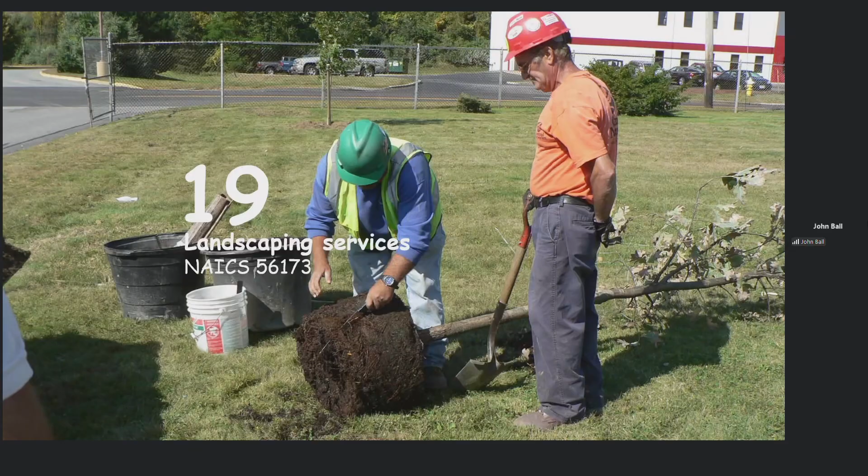Logging's often considered number one, with a fatality rate of about 98 per 100,000, according to the Bureau of Labor Statistics. And as you might expect, this occupation, which we also share some things in common with, chainsaws and trees, is a high-risk profession. But what about us? We're actually lumped under what's called landscaping services, with landscaping, planting trees, pruning small trees, and landscape design installations. So we're lumped in with grounds maintenance workers, mowing lawns, and what they call, and I don't like it, tree trimmers and pruners. We're far more than that, but that's the federal government for you.

But what about just us? If we separate just us, it's 105 per 100,000. Wait a minute, that puts us number one. Now, a couple of surveys actually put us at a close second to logging. That is not where we want to be. But what the federal government has finally figured out is this is a high-risk profession with a fatality rate far higher than most people anticipated. If you go back and look at what I've been writing the last 20 years, I said the numbers are showing we're fairly high, and I don't mean that as a good thing. It depends a little on how you define a tree trimmer and pruner. But any way you look at it, we have a very high fatality rate.

A way to look at it is we're 0.03% of the U.S. workforce. That's far less than 1%. Right? There's not a lot of us in this country, about a quarter of a million. But we're 1% of all the fatalities. That's a lot. Now, do you want to make it worse? Move to California.

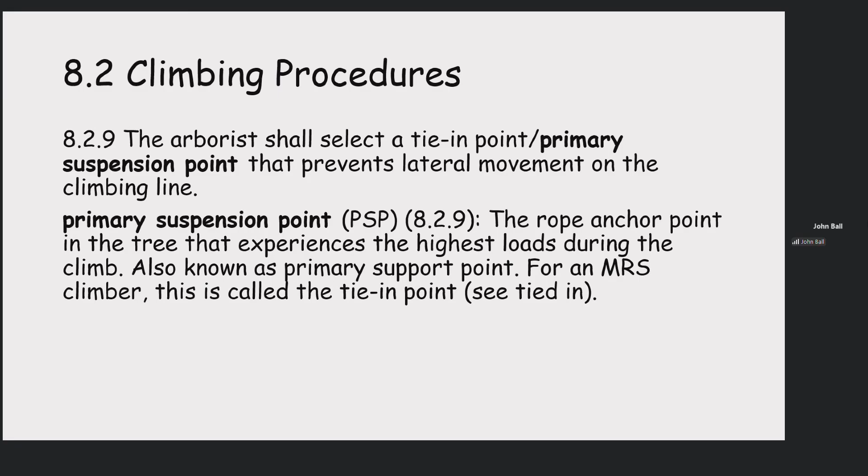Well, what's happening out there? Climbing. That's still one of our most common reasons for a fatality. Climbers who die tend to be a little bit older. Again, getting back to that, we don't bounce, we break. In the old days, we used to free climb. I don't know who remembers that from the 70s, but you'd free climb a tree, sometimes tailing a rope behind you. Well, that's changed, and so have our climbing practices over the last 20 years. Nowadays, we're doing a lot of stationary rope systems. And so with our primary suspension point, we're completely dependent on that holding. Now, that was a change from even '94, where we had to have a climbing line positioned over a branch union or around the trunk.

Nowadays, for canopy anchors, we're often doing this. And there's nothing wrong with this inherently. But if that anchor fails, we're in for a long fall, and we're seeing more of this. Now, we did have in there, we'll test it. Test it by having two people bounce or tug on it. Guess what? That's not a valid way of measuring it, and that has been removed from the current Z.

And here's the reason. You get two people pulling on that, they're pulling with a force on that anchor of about 0.6 their weight, about 240 pounds. One person climbing it is putting a force equal to their weight at all times. And when they're really pulling, a force higher than that, up to 1.4. Brian Kane at UMass has written some excellent articles in Arborist News that have given the numbers behind this. And so the problem is that two people tugging on it is not exerting the same force on the anchor as one person climbing on it. So it gave a false sense of security.

I might mention falls: the higher the fall, the more likely it's going to be fatal. 15 feet, about a 90% survival. You might say, how do you die from a 15-foot fall? Well, your head hits first. At 30 feet, notice that it's about 50-50. Anytime you're climbing above 30 feet, the odds are more that you'll die from that fall than you will survive. If we get fractures and ruptures, when you start falling from a 70-foot fall, you're bouncing through the tree and our survival rate plummets. So every foot you gain in height, keep in mind you've actually increased the risks as well. So manage those risks.

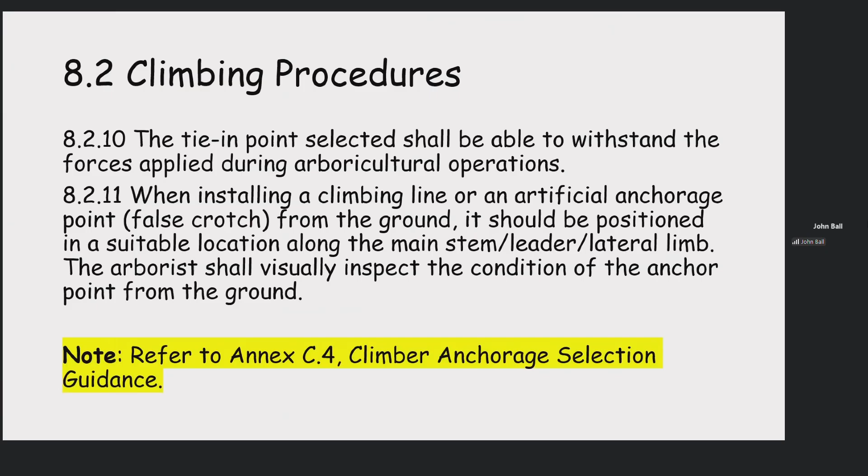Well, how do we do it? We make sure our anchor will hold. Nowadays, what you'll find in the new annex are things you should be looking for to determine whether the anchor will hold, not just relying on the fact that you gave it a bounce test and that should hold it.

Another reason you fall, well, guess what? You only had one form of protection, either your climbing line or a lanyard, and you cut through it with a chainsaw. In the Z, it will make it clear: when climbing, an arborist shall have on their person at all times a climbing line and at least one other means of being secured. And both shall be used when you're operating a chainsaw. So it doesn't matter how you got up that tree, there better be a climbing line with you. And if you're going to be cutting with a chainsaw, that climbing line is being utilized and you're being secured, because what happens is somebody ends up cutting the only line that they had as their fall protection.

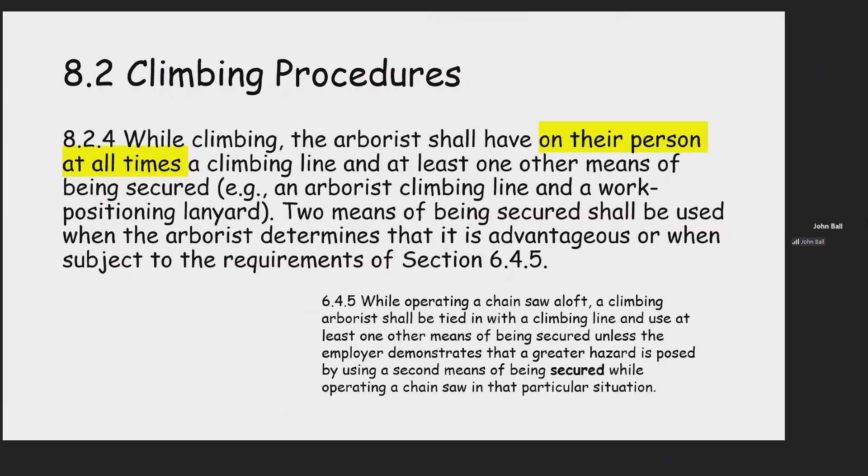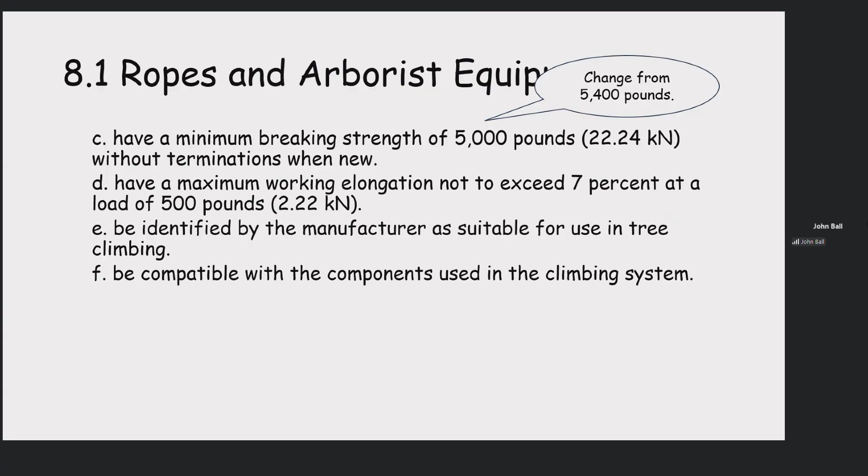As a minor point, we have changed the breaking strength requirements. If you look at our old manila rope, that had a breaking strength of about 2,600 pounds. Our new ones have far higher. Our old systems have been quickly replaced. And so we removed that 5,400 for minimum breaking strength and dropped it to 5,000 pounds. Why? Because all our other hardware is rated at 5,000 pounds. Only the climbing line was higher than that. And so to keep everything in line, it was moved to 5,000.

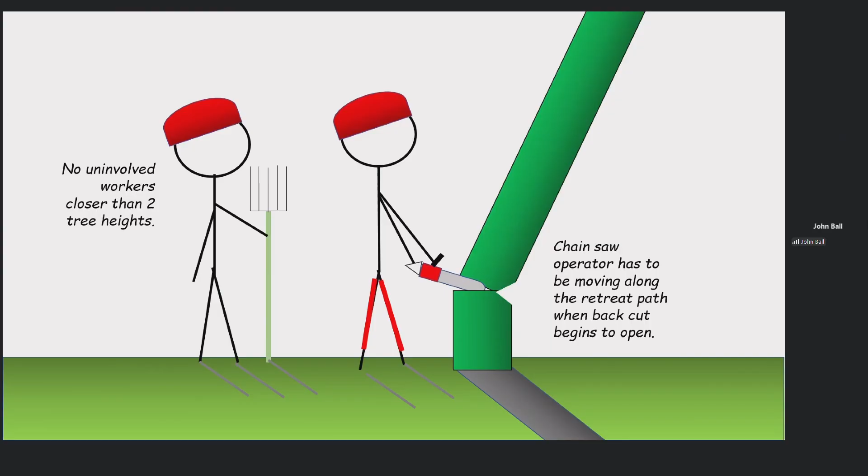Well, struck by a falling tree. This one, it's about the same average age for our industry here. The same average age is still almost the one that's being killed too. So essentially any age can be struck by a falling tree. And there's two reasons for that. Either it's the uninvolved worker standing closer than two times the tree height and struck by the falling tree, or the chainsaw operator was not moving along the retreat path.

Hope you like my artwork.

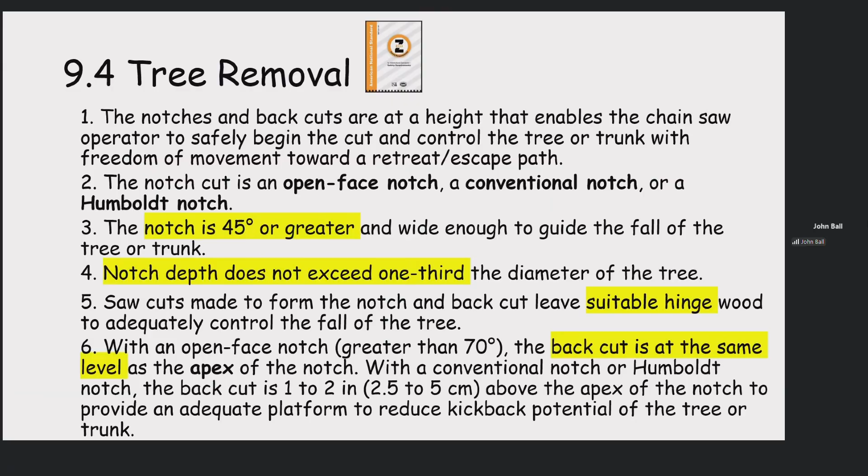How you make your cut, we have not changed that. It's up to you: conventional, open face, or Humboldt. We just have that the notch shouldn't be more than a third, and you have to leave a suitable hinge. If you're doing conventional, notice that the back cut typically is made slightly higher. The reason being is, in order for that tree to hit the ground, it's got to snap off the hinge, because you're closing the cut and the tree's still falling.

With the open face, it's made at the apex. Why? You can have that tree reach the ground and the hinge literally bends that far, because the tree will reach the ground before it's completely closed that notch. This is one reason we tend to use this quite a bit, not exclusively, but quite a bit, because we want to make the hinge work longer.

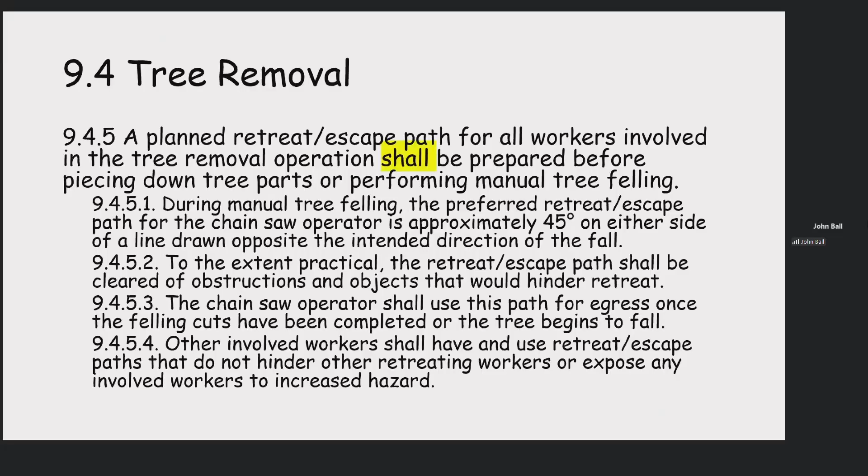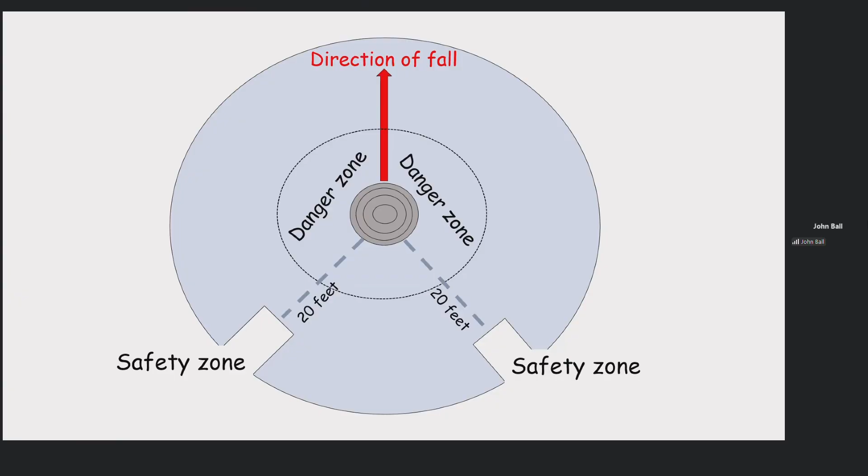Well, everybody stops to watch every time you're felling a tree, and no difference here. The crews are all watching, and this went well. He's got everything ready. They do have a rope on it, but now we do have an error. And the error is he is standing next to the tree rather than walking along his retreat path. You're always supposed to be moving along your retreat path, 45-degree angle back, the second the top of the tree begins to move or the back cut begins to open. Most of the chainsaw operators that are killed are within about 10 feet of the base of the tree. Why? They were standing there, not moving, and they were struck by the tree as it rolled or kicked back.

Well, the other half of fatalities are to the ground crew. And what we're required to do is give a command when we're ready to start the back cut and not to do the back cut until we have a response. We have removed what language to use from the Z. What you use as a command or response is up to your company and should be in your safety policy. But we didn't specify what two terms you use. But you shall use a warning before making a back cut and wait for a response before proceeding.

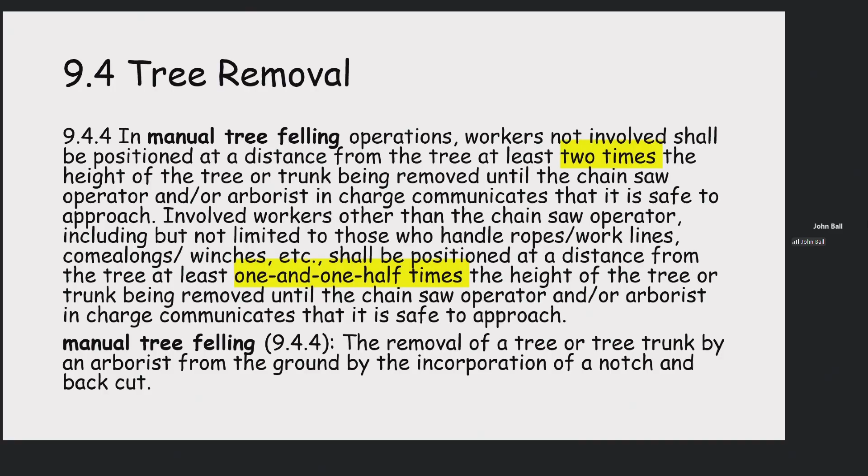Now, where does everyone else have to stand? If they're uninvolved workers, they're not tending a pull line, then they need to be 2 times the height of the tree, 2 times the height. If they are tending the line, in other words, they're an involved worker, then they can be no closer than 1.5 times the tree height. So if we look at that, the chainsaw operator is standing at the base of the tree, they have to in order to do the job. Involved workers no closer than 1.5 times, and then everyone else 2 times the height of the tree.

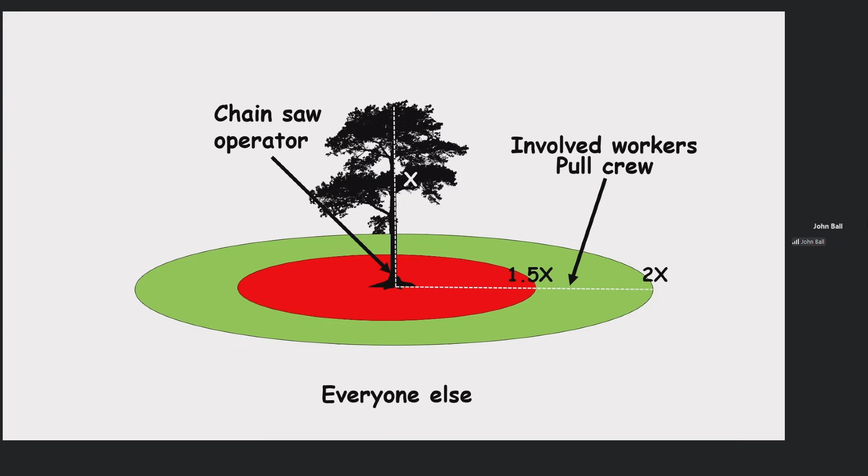If we followed that other half that's killed, people being struck by the falling tree, either the involved worker standing too close or someone just wandering by. In other words, they don't have anything to do for the job yet. Those are the ones that are killed, and we're trying to keep them outside that zone.

Well, electrical is still our big one here. It's a top three killer of tree workers. Everyone should have a fundamental knowledge of this. And I also want you to note that this is one area where we actually have a higher fatality rate among younger arborists than older arborists. The thought being that if you've been doing tree work for 30 years or so, you probably developed that sixth sense to be aware of the conductor, that you've looked for them.

Otherwise, electricity kills young as well as old people. So it's not that as you get older, you have tougher skin and you're not going to be impacted by it. It's just you've been working a long time, you have a higher situational awareness. And we have to know the entire system, from phase wires to neutrals to secondaries to comm wires. The entire electrical system for distribution is something we're all supposed to be aware of.

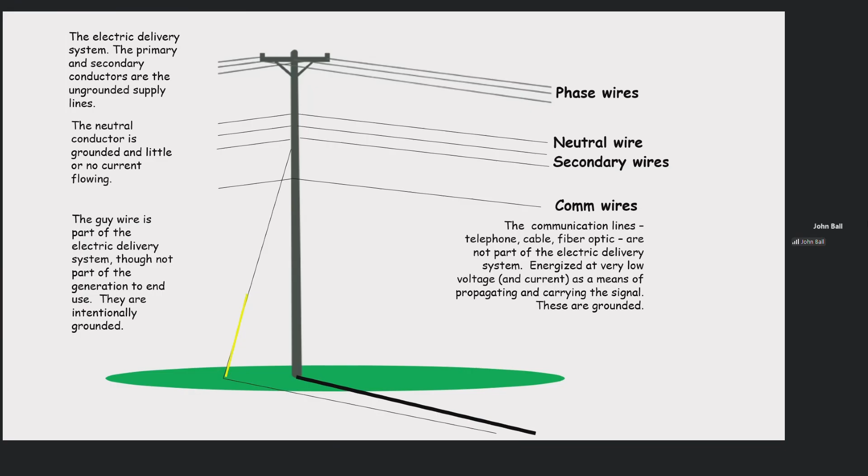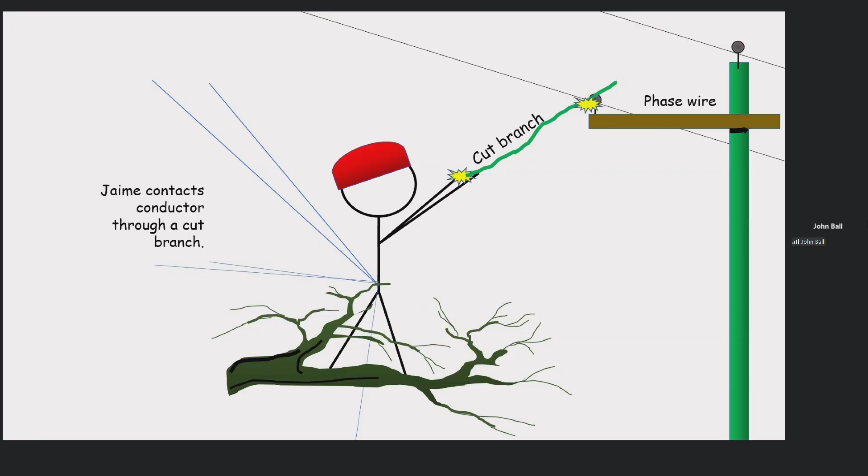Well, how are we killed? Number one, about 26%, the branch you're cutting. You either just cut it or you're cutting it. It comes in contact with the conductor. Example here, Jaime's holding a branch and the branch makes contact with the wire while Jaime's holding it, and Jaime dies. Now, interestingly enough, the diameter of the branch is a factor in conductivity as well as its length.

Palms, for example, we have a lot of palm fatalities, a lot of palm electrocutions. And even in the Z, we say, you know what, you've got to follow the standard on these, because you touch a palm frond to a power line, it's amazing how often that kills people. And Florida leads the country in electrocutions, and it's because of palms.

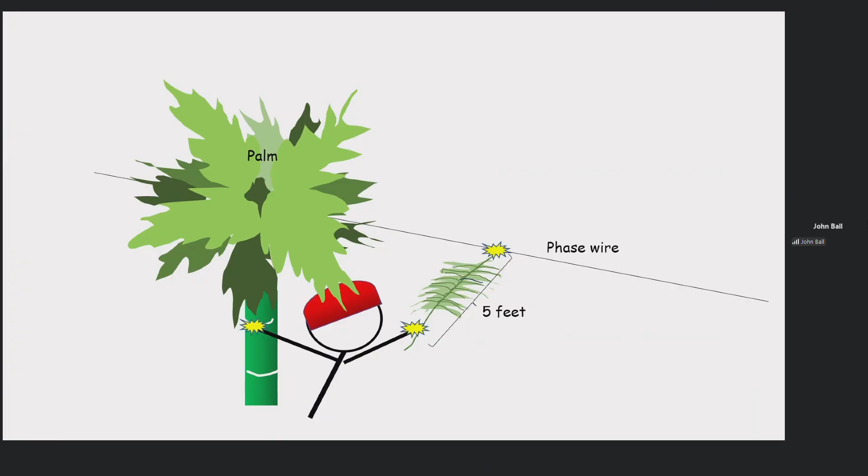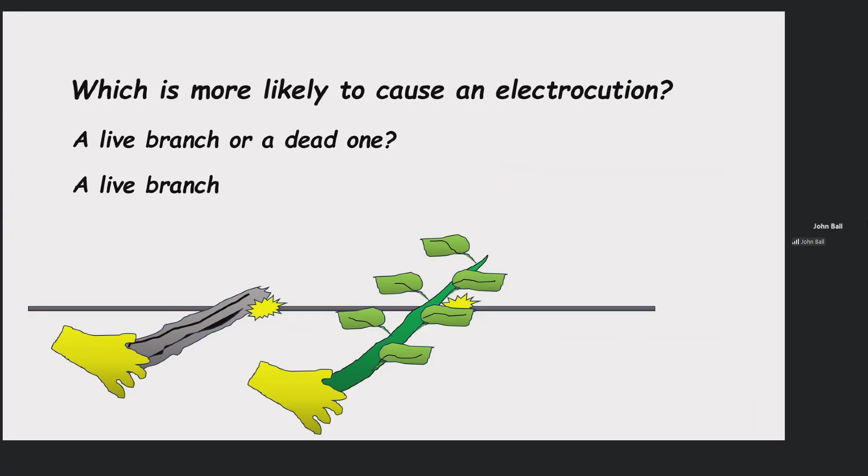So let me give you a quiz. What's more likely to cause an electrocution, a live branch or a dead one? Hopefully, you know it's a live branch, more conductive. All right. Second question. What's more likely to cause an electrocution? Holding a long branch at its base or a short branch when it touches the wire? Well, I think that's pretty easy. Holding the short branch is more likely to have an electrocution.

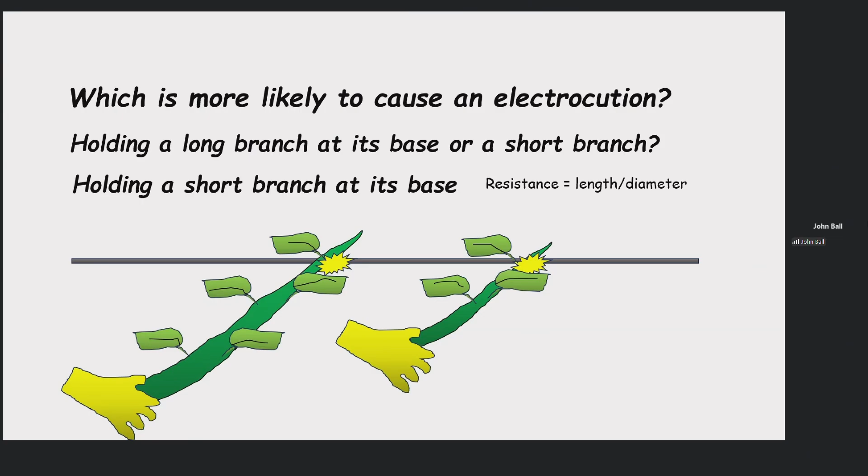Why? Because resistance equals length divided by diameter. So the more length of the branch, the more resistance you're going to have to that branch. But here's one that confuses people. Holding a large diameter branch or a small diameter branch. All other things being equal, the large diameter branch is going to cause more of an electrocution. You might go, whoa, wait a minute, I wasn't thinking of that, but keep in mind that formula. Resistance equals length divided by diameter.

Larger diameter is a larger hose. Think of it as a larger gauge wire. So they're more conductive, and that ends up killing arborists. They sweep a small diameter branch against the wire and they get a tickle. And they think, well, that doesn't harm me. No, they just got lucky. They grab a larger diameter branch and do the same thing, and they're flat out killed.

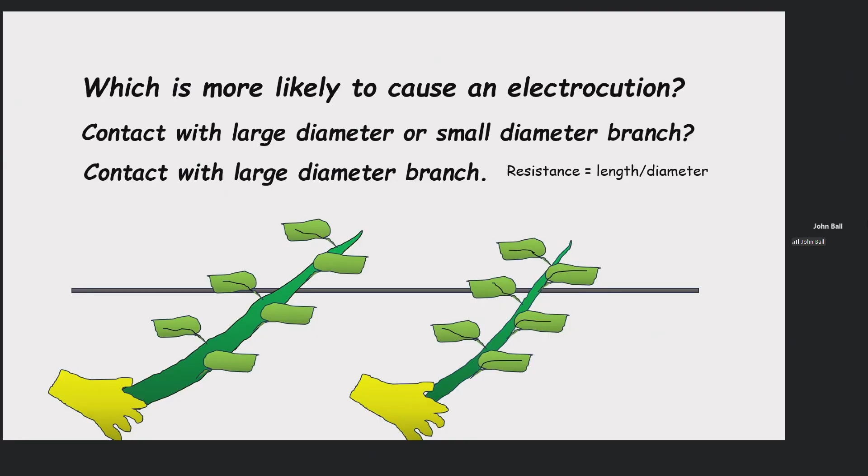Number two, it's the conductive object you're holding, such as a pole pruner. And you shouldn't be carrying metal pole pruners in trees. Quite often, these happen because no one did a good job inspection, and they were unaware that a power line was even up there. But these are the second most common killer. And notice now we've covered about 50%.

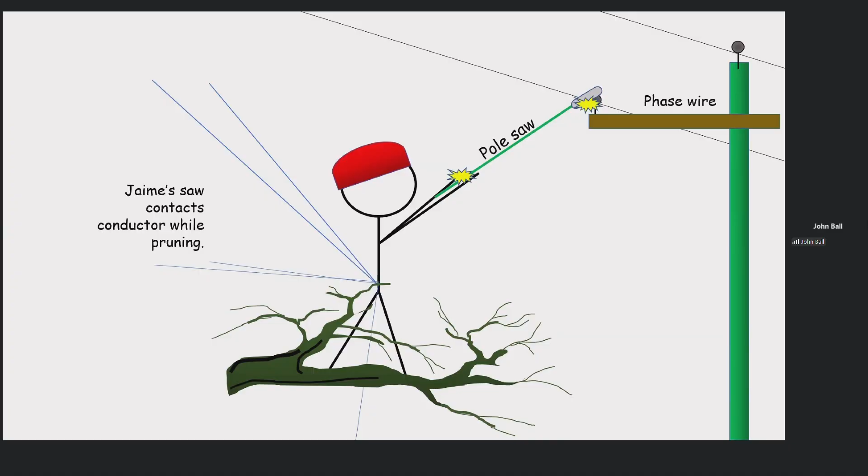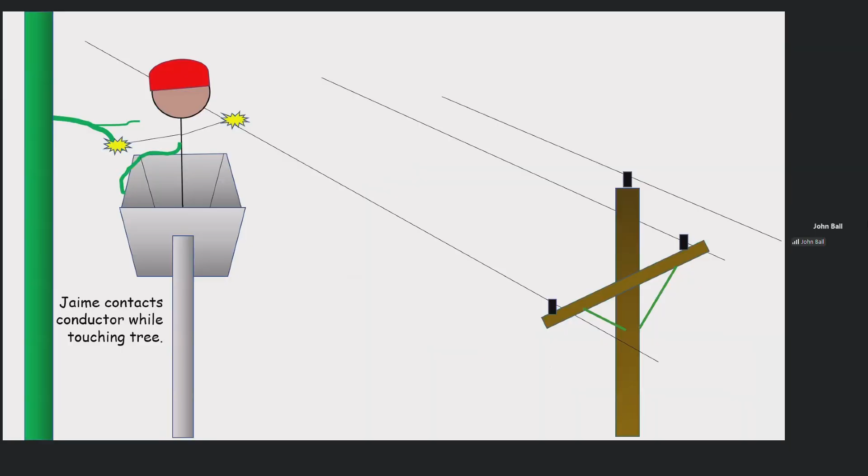What's number three? It's direct contact. Aerial lift operators, surprisingly enough, they back into the wire and they directly contact it with their shoulders. Or they're touching the wire while they're touching the tree, or their pole saw is doing so. The fact that you're in a bucket doesn't mean that you cannot have a fatality, that you cannot conduct electricity.

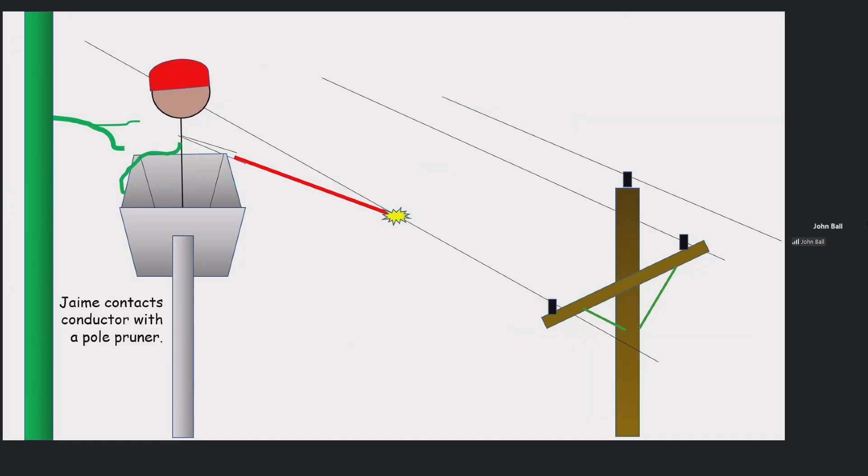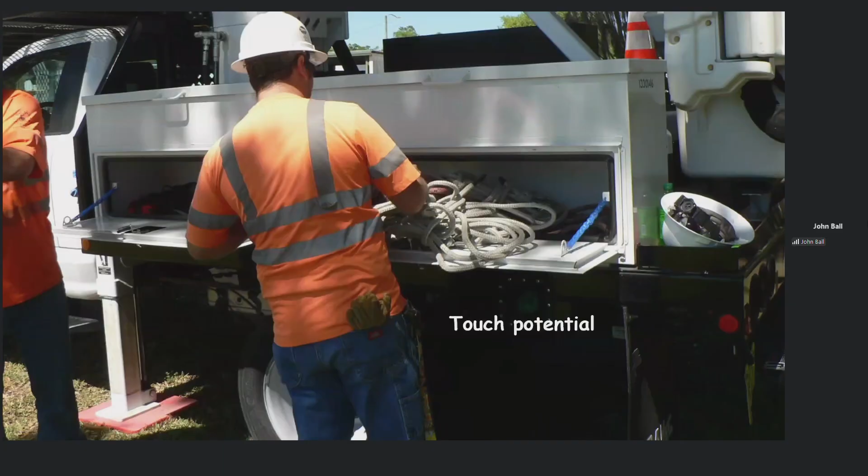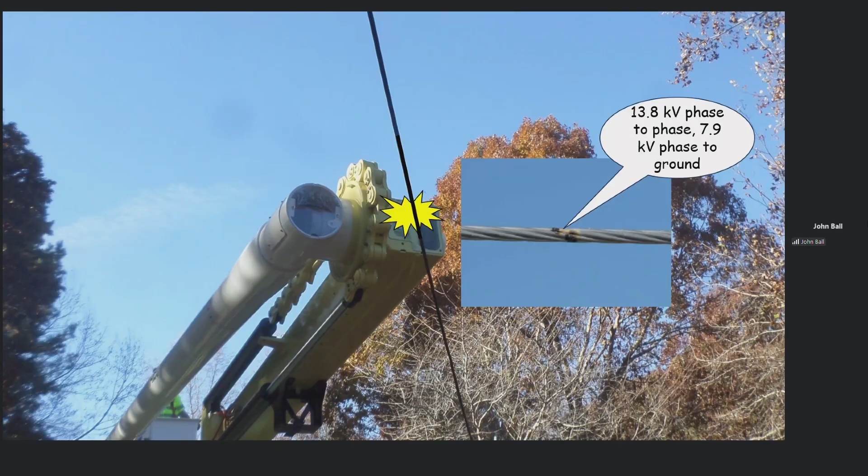Well, next it's the ground workers, and they're touching the truck when it makes contact. We call this touch potential, touching the truck when it came in contact with the wire. But then we also have step potential. We're seeing these numbers increase. The knuckle of the boom came in contact with the wire, in this case, like a 7.9 kV line, phase to ground. In the actual incident, this happened. Step potential. Since the person had the 2 feet apart, there was about 500 volts 12 feet from the truck.

You know what 500 volts will do? It can throw your heart into V-fib. This is very common where we see the need for doing CPR, when someone ends up dropping because of step potential. Now, once again, you don't want to approach that person if that knuckle of the boom is still in contact with the wire, but it's swept away so it's safe. These are the cases where we're not dealing with burns, but the need to do CPR because their heart is in fibrillation, though we can have some tissue burn.

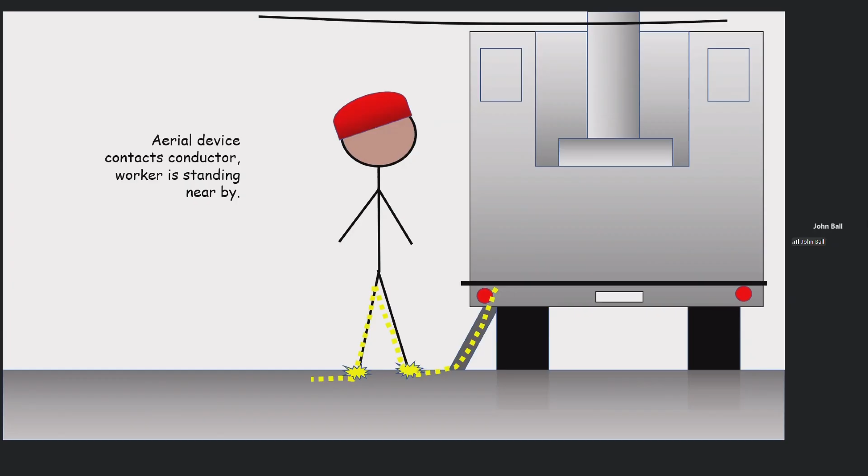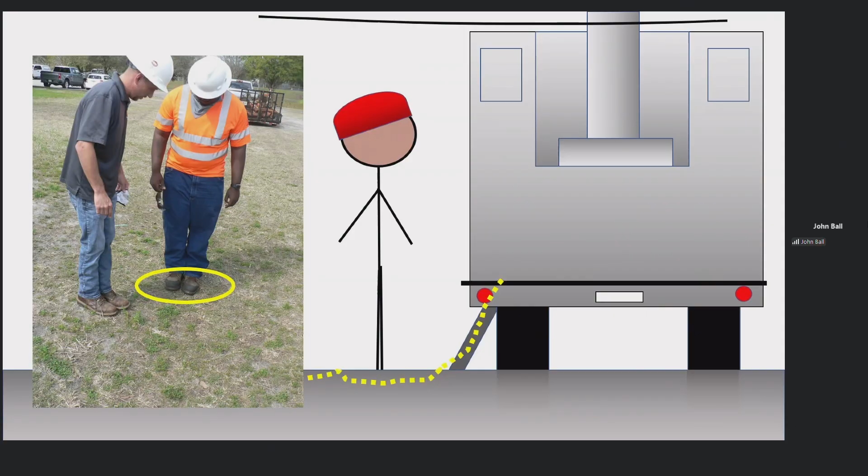Well, what do you do when you feel that little tingle? Feet together. Feet together. Why? The potential is now the same. We have no difference in voltage. And if you don't have a difference in potential, you don't have current, and current is what kills. So feet together, and you shuffle away, heel to toe, so the 2 feet are always touching each other.

Well, how far do you shuffle? Some of you might remember back in the 90s, they told us 6 feet. No. Before you break into a run, 30 feet for distribution voltages. Shuffle away. I don't care if you shuffle to the next county, but too often people start breaking into a run too soon. Now we have a greater distance between the 2 feet. We now have potential, and you're going to have current, and it may be enough to throw your heart into V-fib.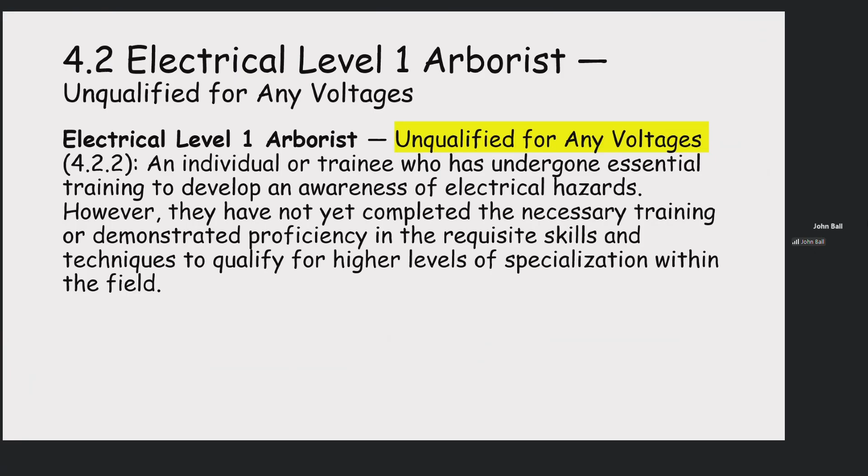And let's start out with the level 1 arborist. Now, this is somebody unqualified for any voltage. By the way, this includes communication lines as well. A level 1 arborist cannot be in any tree if an electrical supply line or communication line comes within 10 feet of the canopy.

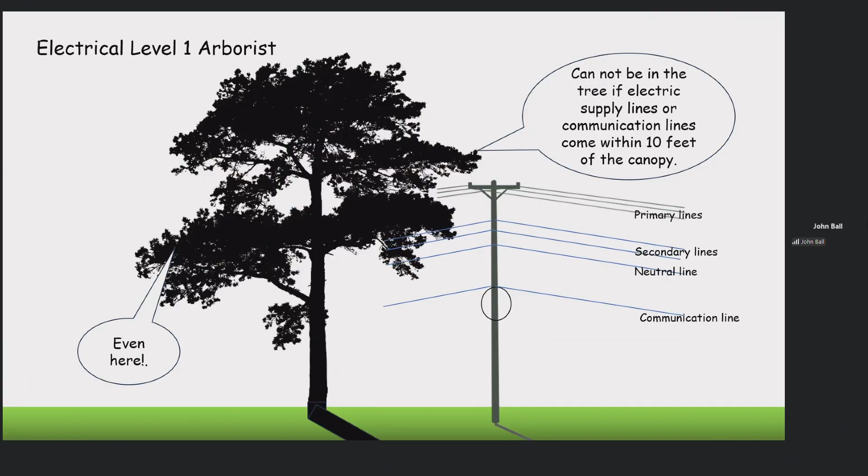Not even if they're the other side of the tree. So think of that. This is any dark line in the sky: if it passes within 10 feet of the tree that they intend to be in, either on a step ladder, a stool, climbing, aerial lift, even if they're working the far other end of the tree, no. If you're a level 1 arborist with minimal training, okay, you're done.

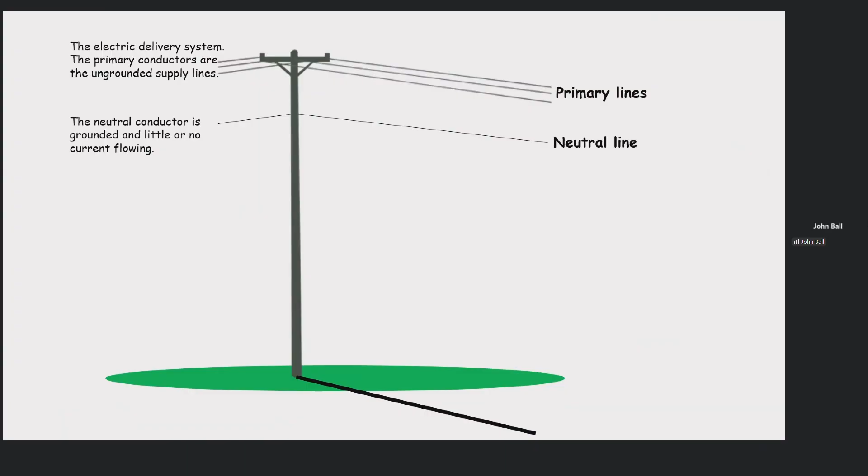A level 2 arborist is a new category, and they need to know the entire electrical system. They need to know so they can identify what's a primary and neutral, and even all the communication wires. They have to avoid contact with any lines 300 volts or less. They may not touch them. And they have to maintain 1 foot 6 inches from everything up to 750 volts. Beyond 750 volts, they have to stay 10 feet away.

However, they can be in a tree that's closer than 10 feet from a primary line, but their person or the branch they're cutting may not be within 10 feet of that power line. So, in other words, they can prune around comm lines and service drops.

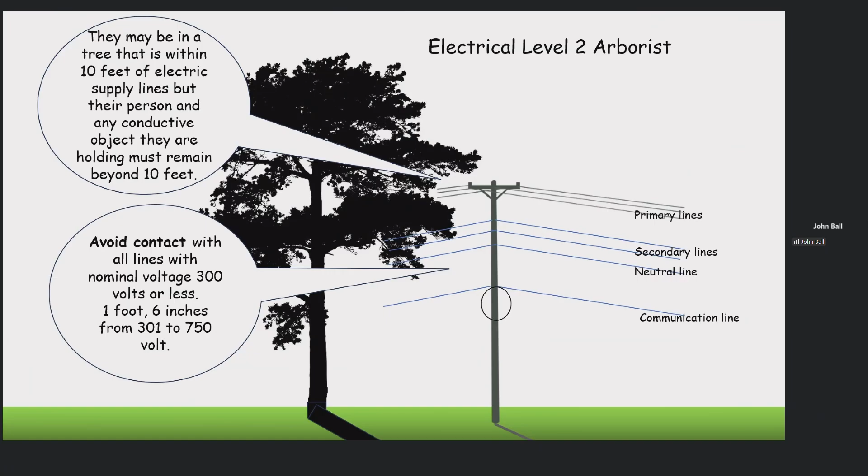Now, the level 3 is what we used to call the incidental line clearance arborist, and they can work closer to primaries, and they have minimal approach distances that go up from 2 feet 9 inches, 2 feet 10, 3 feet 4, but above 35 kV, they're 10 feet away. So everyone in the room that's familiar or are the incidental line clearance arborist, you'll just now be called a level 3 arborist.

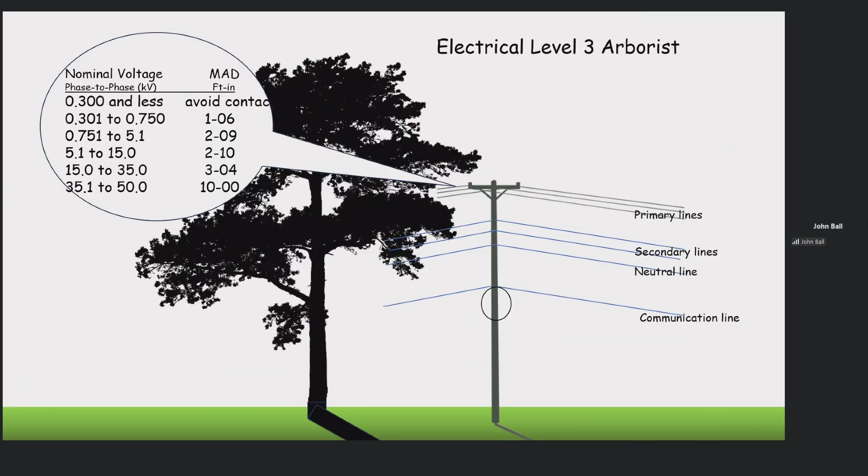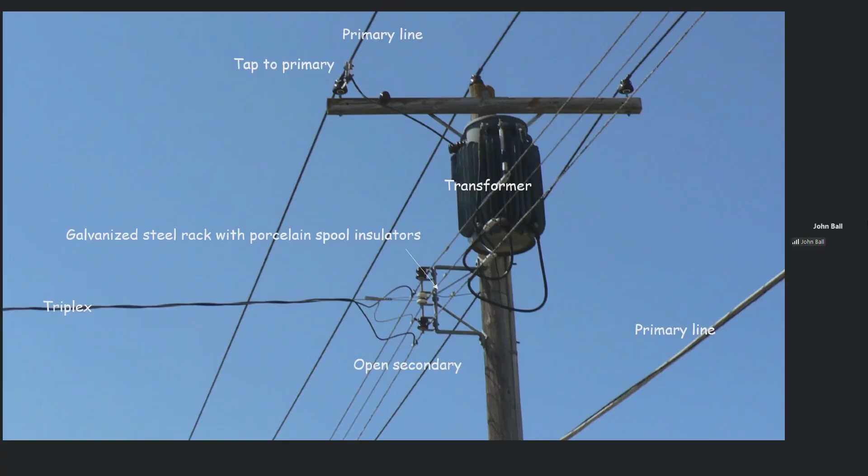And you know all parts of the system. You've taken electrical hazard classes. You know what a transformer is and does. You know how to identify secondaries. You know how to identify primaries. You know what a voltage regulator is. You know all the rules and regulations to safely work in that electrical hazard.

If you're a line clearance arborist, meaning that you're employed by the utility either directly or indirectly, you're a level 4 arborist now. Okay. And that, again, only applies to those people, and you've got your own minimal approach distances. But the big changes are the level 1 and 2, and they even apply to landscapers.

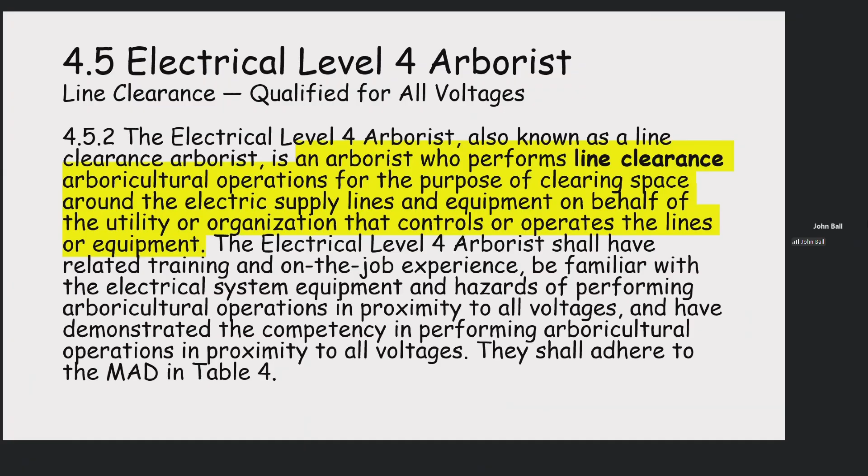If you're a landscaper pruning a small tree, and there happens to be a service drop within 10 feet of it, you cannot be there unless you have the training and experience. In other words, at least a level 2 arborist. It doesn't matter what you call yourself, you are an arborist if you're being paid and working in a tree.

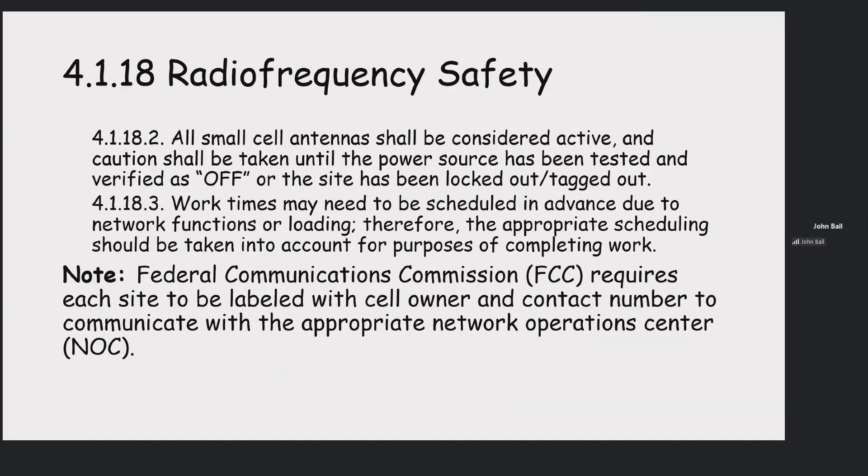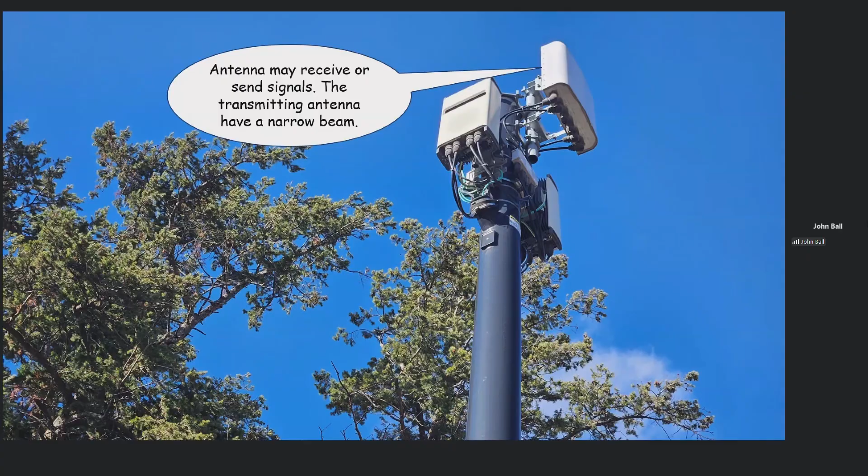The new hazard too under electrical is radio frequency safety. We have all these small little towers dotting the landscape. This is on my own campus. This might be sending signals, it might be receiving signals. You cannot tell just by looking up at these things whether they're beaming a signal out or receiving a signal. And some of these can do both, but they're dotting the landscape now because we all use our phones for data transmission. So all these small little cell towers are actually beaming to larger towers sending at greater distances.

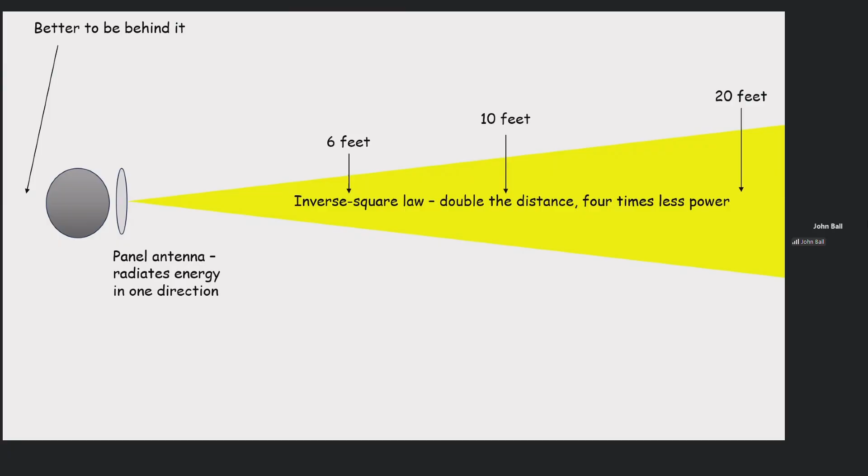Now, you have to stay away from these. How far? It's not as far as you might think. The inverse square law says you double the distance, 4 times less power. I'll talk about how far here in a minute, but it doesn't mean you have to be miles away. Also, you have to consider that all these cell towers shall be considered active.

My recommendations: you should notify your supervisors and remain outside any distance the provider requires. When I asked Verizon for the ones on our campus, they told me 20 feet. Fine. If it's red, okay, that can exceed 10 times the limit. Now, when I say must be shut off, that's my recommendation. This is not coming from the Z. They don't have that specific. But I want the person standing there telling me they shut it off.

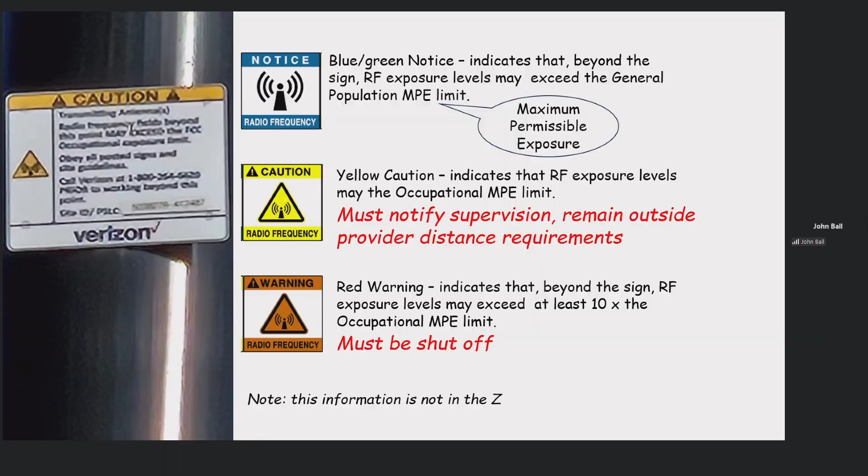That's an awful lot of energy. Fortunately, you don't see a lot of these out there. Most of what you're going to see dotting the landscape are the yellow. Well, there's that same tower. How do I know what it's doing? How do I even know it was there before I showed up?

Once you're used to using this map, you can take a look and you'll know if you're going to find one of these near any trees you're working. Now, if you're in residential areas, it's not a big deal. But if you're in commercial areas, or near any sporting events, you can find these. And you don't want to have the crew find one when they show up.

Obviously, you want the bidder to note these and put in that they ought to be shut off if they need to be. But you know what? It doesn't hurt to type in an address and check this map. I use it. It's great. A common recommendation is not to work any closer than 6 to 15 feet. My suggestion is to call the cell provider and follow their requirements.

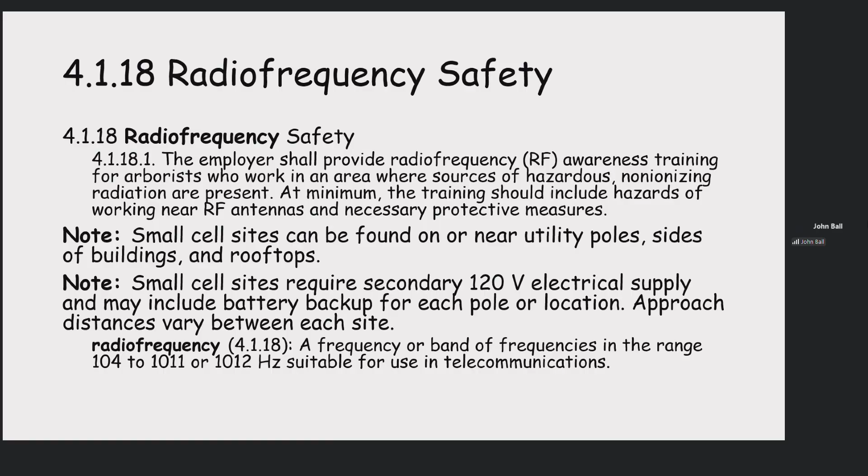And you're required to let your employees know everything I just told you, that there are hazards. It's a thermal reaction. You do not want to get burned by this, so you should stay away from it. You should follow the provider's recommended distances. And there is a number you can call if you need it shut off. All right, well, let's keep going.

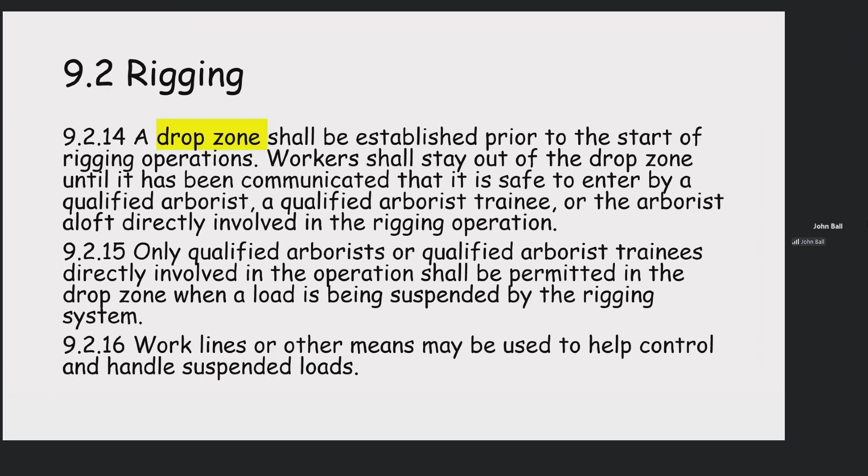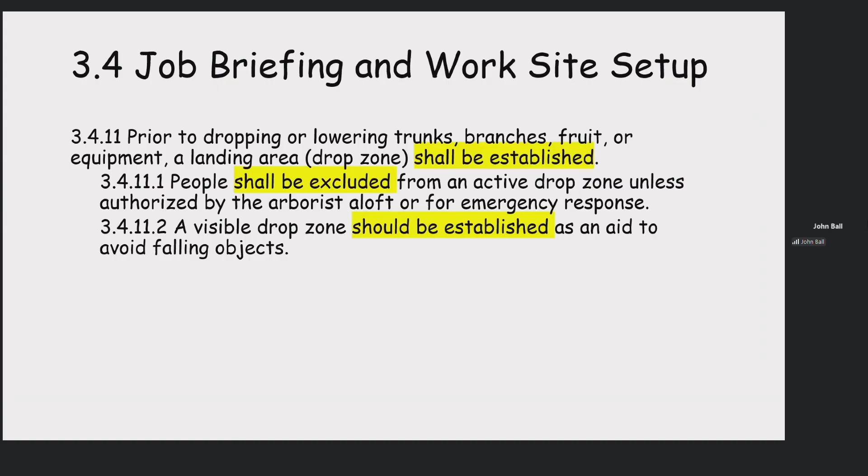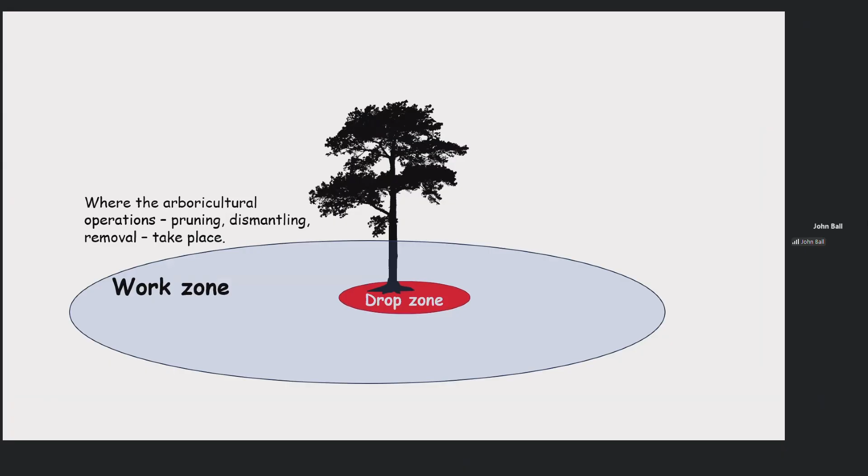But what defines the drop zone? We have a work zone. That's where all of your activities are occurring. But within that, we have a drop zone. And is that drop zone the area just beneath the tree? Is it the area beneath where you're working? Actually, no. What defines it is the area beneath workers aloft where the potential for struck-by injuries from falling objects occurs.

So what does that mean? If someone gets hit by a falling object, perhaps it bounces, they were by definition in your drop zone. So be very liberal when you're establishing your drop zones. You can't argue, well, he was struck, but he was outside the zone.

Aerial lift falls are about 1 in 10 of our fatalities. It tends to be the older workers; they're often flying these more. And so when you're out there flying these, the big reason you fall out: either you overreached and you weren't wearing fall protection, or the boom was hit by a branch which bounced you out of the aerial lift and you weren't wearing fall protection. This is common. Jamie wasn't wearing fall protection and fell out of the bucket when it was struck by a falling branch. So what do we have in there?

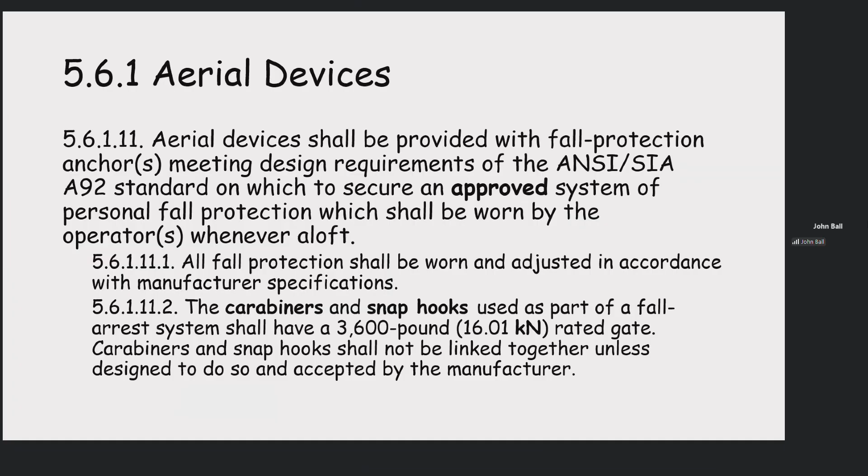You shall wear fall protection, right? It shall meet certain requirements. Now, you're not allowed to use body belts anymore, what was called fall restraint. You still could tumble out of the bucket with these, but now you're being supported by a very short lanyard and that could snap your back. So these have not been allowed for a long time. But the two we do allow: fall arrest. This is probably what most of you are wearing when you're flying the lift. You could tumble out of the bucket, but you don't hit anything because it arrests your fall.

There's also travel restraint. Travel restraint, notice that you're clipped on both sides, not with one, but with both. You cannot fall. You are restrained by staying in the bucket itself. Now, some people don't like wearing this because with most of the systems, it limits your movement. You can't turn around very easily. But nevertheless, it's a great way to make sure you don't leave the bucket at all. However, since fall arrest is what most of you are wearing, make sure you're wearing it properly. We do have that as a requirement that it has to be adjusted.

And here's a good example. Drew here was wearing his properly. If you take a look, the clip was right between his shoulder blades and his chest strap was on his chest. When he stepped off a beam, he's still in a vertical position with the chest strap on the chest. Now, all we do is loosen it so that it's actually in his back rather than between the shoulder blades, merely 3 inches. Now, look how he's being supported. That can seriously hurt you if you fall out of a bucket. It can harm your neck, it can break your back, it can do a lot of internal injuries.

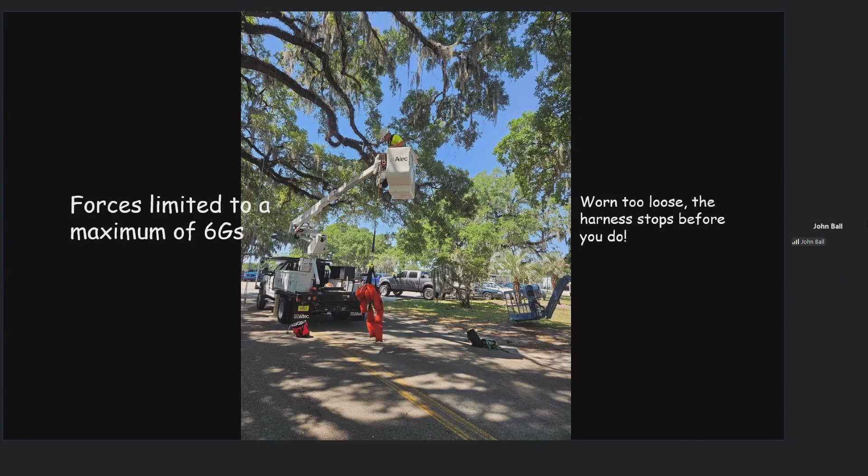And guess what? We even had it where you're asphyxiated because now the chest strap is actually too high and cutting off breathing. Also, consider you could be almost 6 Gs in that fall. So you don't want to wear these things too loose. Neck, back, groin injuries are all possible. So here's the way you wear them. You make sure the attachment is between the shoulder blades. Otherwise, you could end up with spine and neck fractures. You want to have the chest strap mid chest or for women slightly above the breasts. Too high can cut off airways.

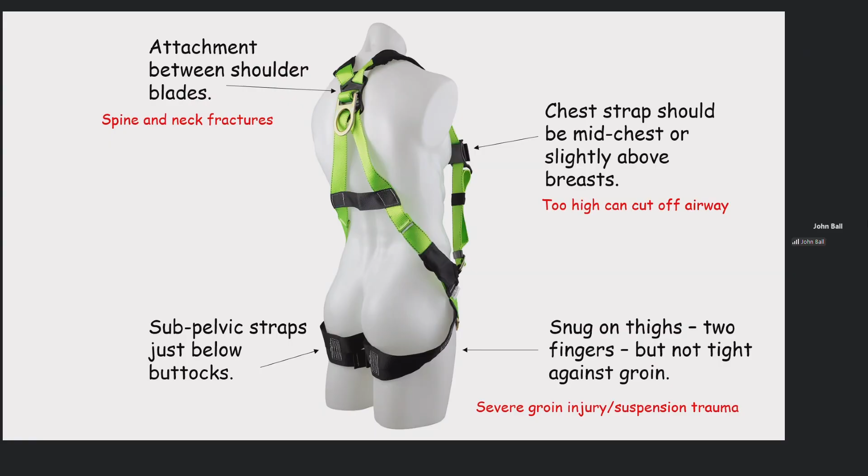You also want to have the straps just below the buttocks and snug on the thighs, but not tight against the groin. You want to have a 2 finger rule, but not any looser than that. Otherwise, what will happen? You can end up with severe groin injury and it can pinch off blood flow and increase the possibility of suspension trauma.

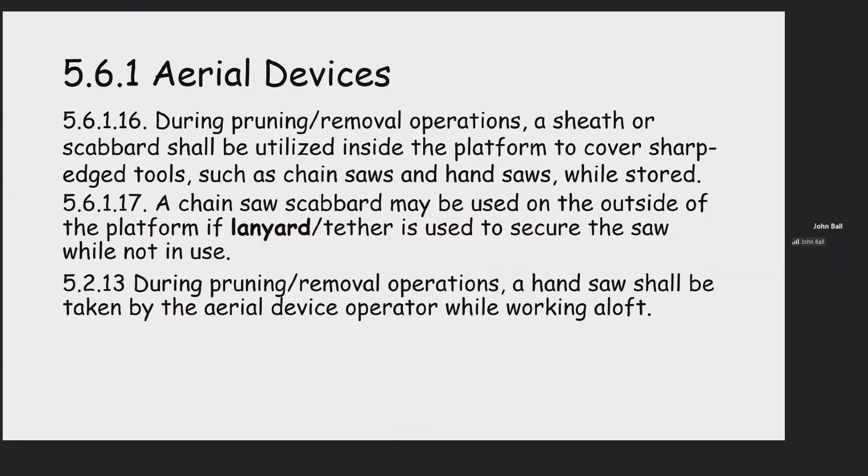What else do we require? You have to carry a handsaw. The other thing, too, is if you have a chainsaw, and almost all of us do, you have to have a chainsaw scabbard on the inside of the bucket, not outside of the bucket. If the bar's too long, then you can have the scabbard outside, but you have to tether the chainsaw when not in use. But if you're up there, you shall have a handsaw with you at all times.

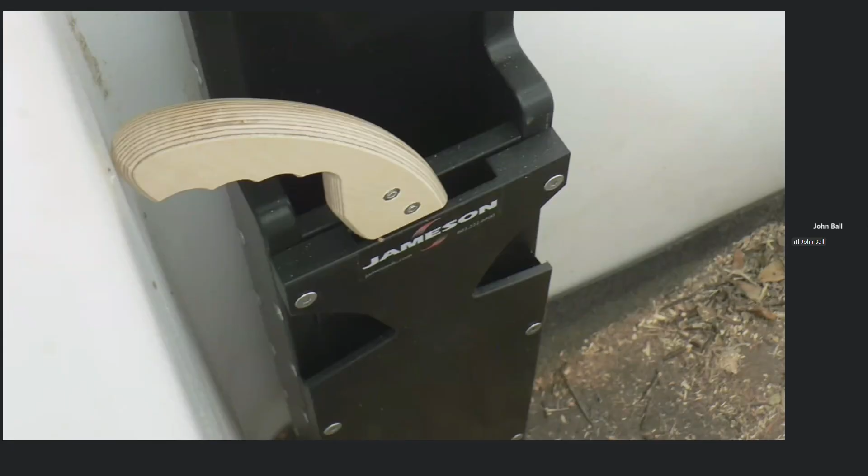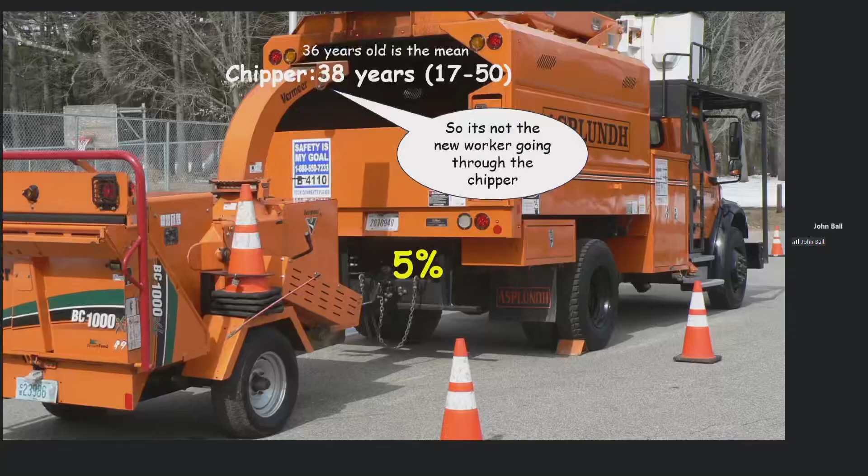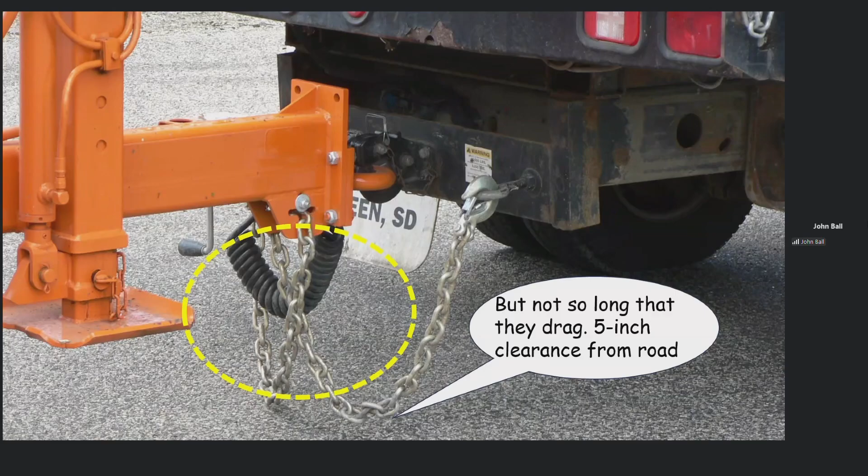Well, a couple of basics here. Make sure you actually are crossing these chains, not letting them drag like this when you're hooking it up. Cross them and don't let them drag. You need about 5 inch clearance so you're not sparking. And when you're running these, have you ever read these things? Don't stand on them. You will be injured. I like this one: Just do not touch. It'll kill you and it'll hurt the whole time you're dying.

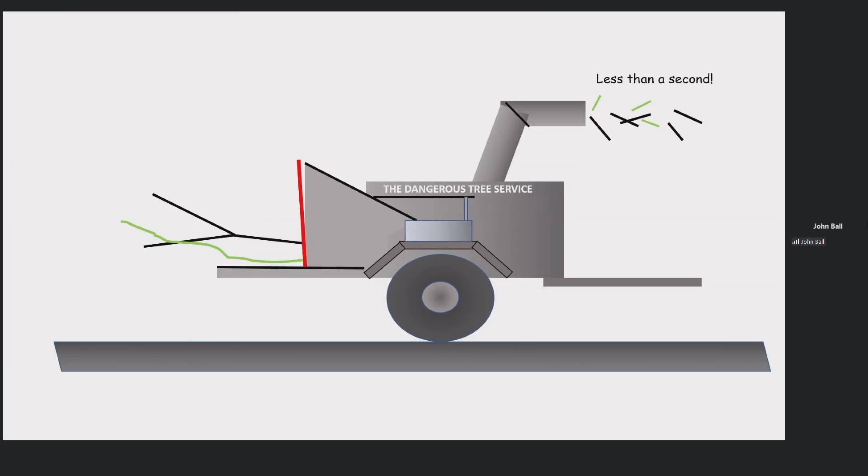So here's Jamie working for the Dangerous Tree Service. And what's Jamie doing? Pushing too far with the hands, holding right in to clear that jam. And guess what? The studies we've done show Jamie can go through that out the chute in less than a second. You don't have a lot of time to react when you're going through a chipper.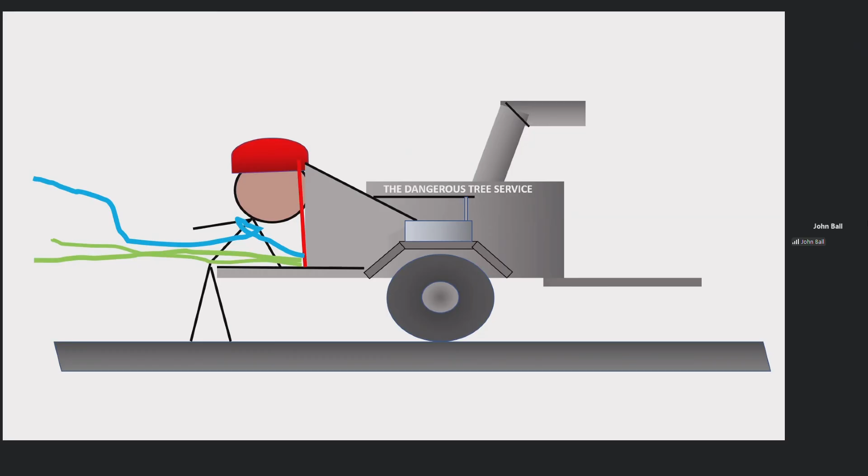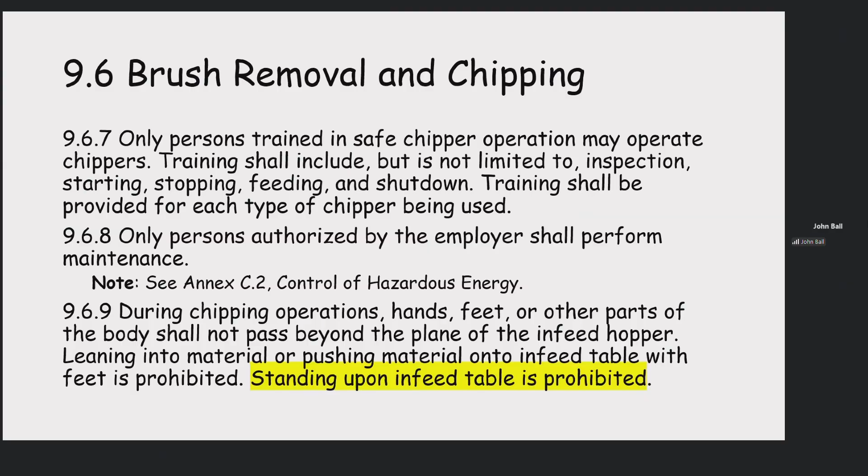And don't ever stand on the infeed table and don't ever push the brush through beyond that plane. It can grab you, and unfortunately, it does. So feed from the side. Wear tight fitting gloves. Don't stand on the infeed table. It's surprising we even had to add that. And watch the gloves you're wearing so they will not catch either.

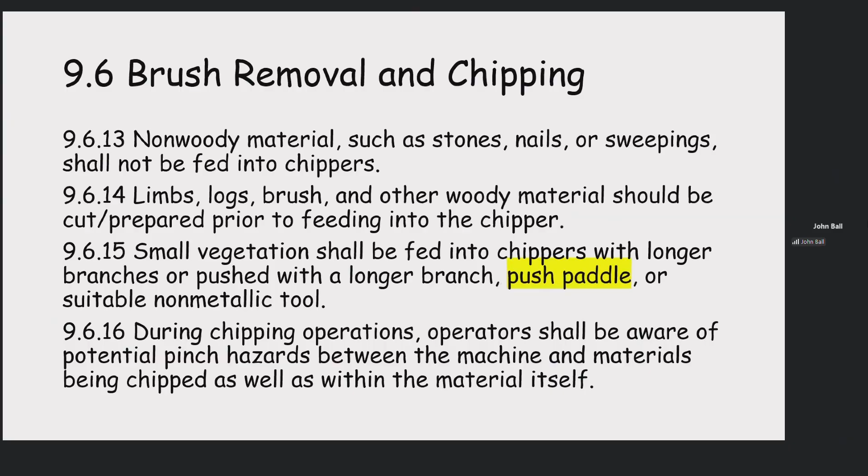Instead, use a push paddle if you can, or a longer branch. I like push paddles. It's kind of funny. I was talking to a manufacturer at one of the shows, and I said, does anyone ever come back and buy a second push paddle? Almost never. You are allowed to do that, though. If you end up feeding a push paddle through, get another one. It's a great tool and far better than using your arms or a metallic scoop shovel.

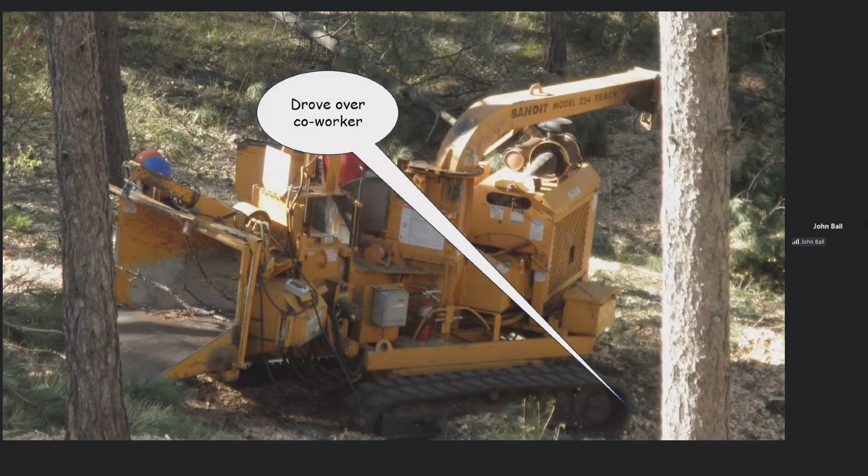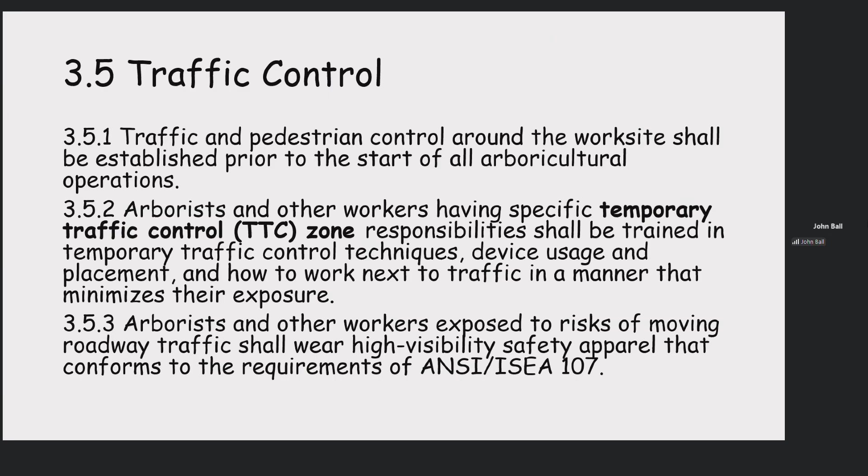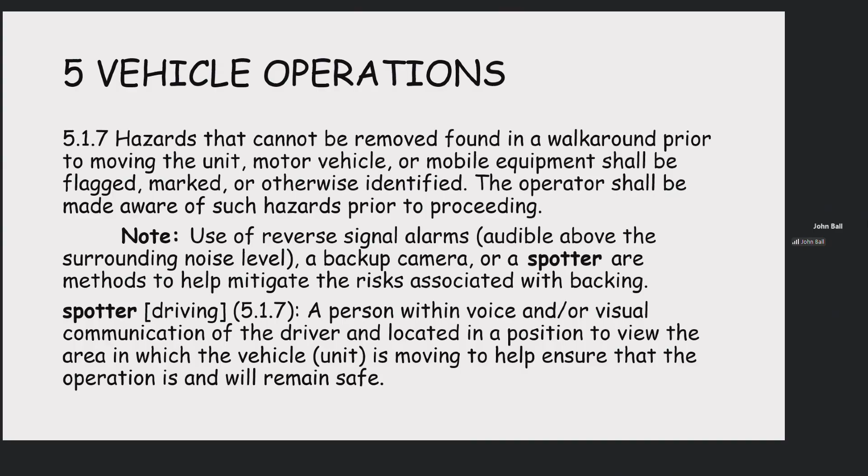But guess what? No one sees the signs. They're texting. So make sure you're very observant around any of the work zones. Coning is good. Make sure you've got the proper ones, but don't stake your life on them. Everybody here has felt the mirror go by and noticed somebody not even looking, texting. Unfortunately, we're not looking either, so we tend to back up over our own workers with our trucks. So, yes, you're supposed to have a reverse alarm, a backup camera, or a spotter. When you're backing up, make sure we don't back over a worker who's touching up a saw or such.

The other problem we have is you have storm damage and you're cleaning this up, make sure you're always aware of any skid loader working out there as well, and the operator making sure that they know where everybody is standing. Unfortunately, these units do tend to back up over workers, so use the mirrors as much as you can.

Palms, you know what? We don't have a good idea exactly how many people die from climbing palms. Reason being is a lot of these go unreported, surprisingly. They don't catch the notice. We can find them out of police reports or fire and rescue. And by the way, fire and rescue reports indicate there's far more than the government actually has reported to them. And many of these are asphyxiation. Someone's working beneath the canopy of these, and as they're cutting the fronds, they tend to collapse on them.

And so in there, we now have a separate palm section in the Z as to how you should be working in and amongst the palm skirts. And you shouldn't be working below them except under certain circumstances, and as much as you can, working them out of an aerial lift is far better.

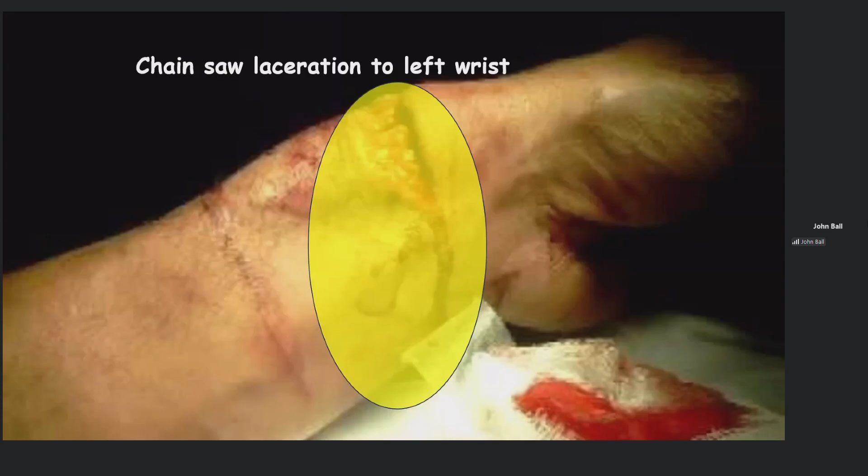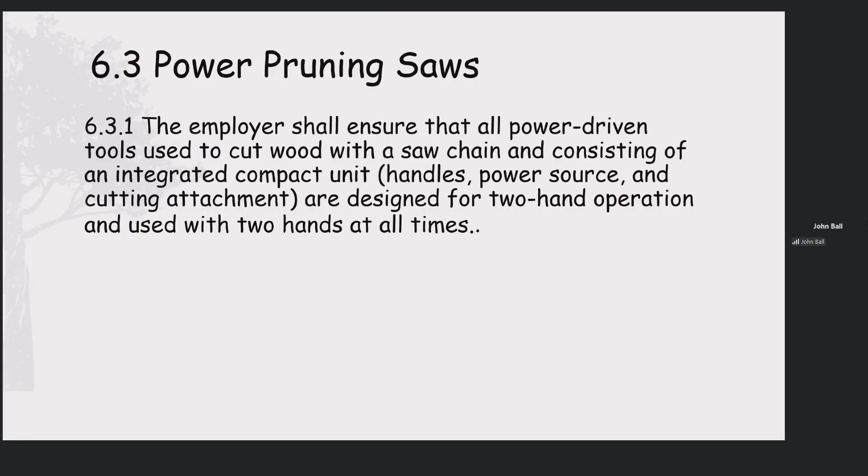We're not so much concerned about kickback. They're not going that quickly. What we don't want is you cut your other hand because you're holding the branch that you're cutting. And even though these are not quite a chainsaw, nevertheless, they can tear up a hand pretty darn quick. Since they're not a chainsaw, we don't have quite the same requirements as operating a chainsaw, but nevertheless, treat them with respect.

By the way, some of the rules also include pole pruners. Pole saws, you do not need to be wearing chaps. The cutting blade is very far from your legs, but you still need hearing protection, head protection, and eye protection.

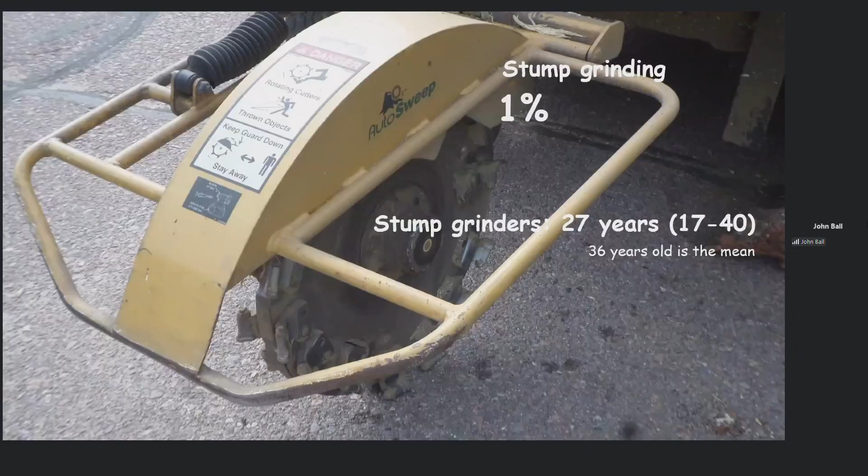Finally, stump grinders at 1%. Notice this group's a little bit younger than the average age at 36, though surprisingly, this is a job that at many companies, it's the old fella, me, for example, my age, that would be out there running the stump grinder. That's what I had in many of the companies that I worked for. Unfortunately, we've seen the fatality rate increase on these.

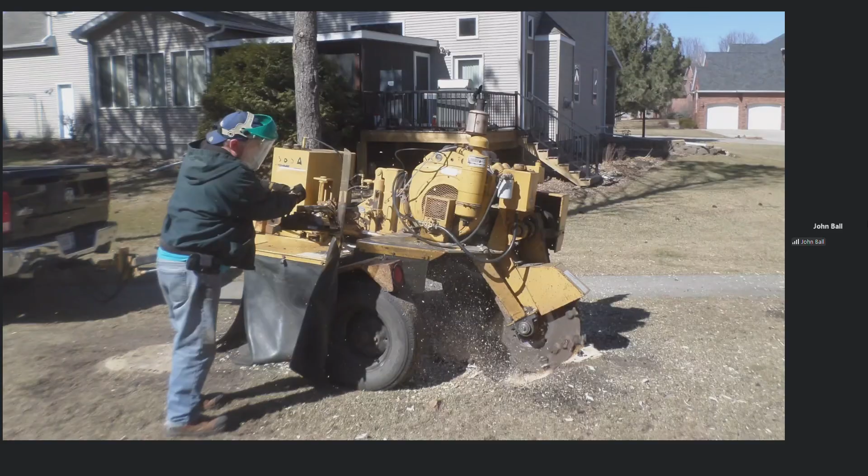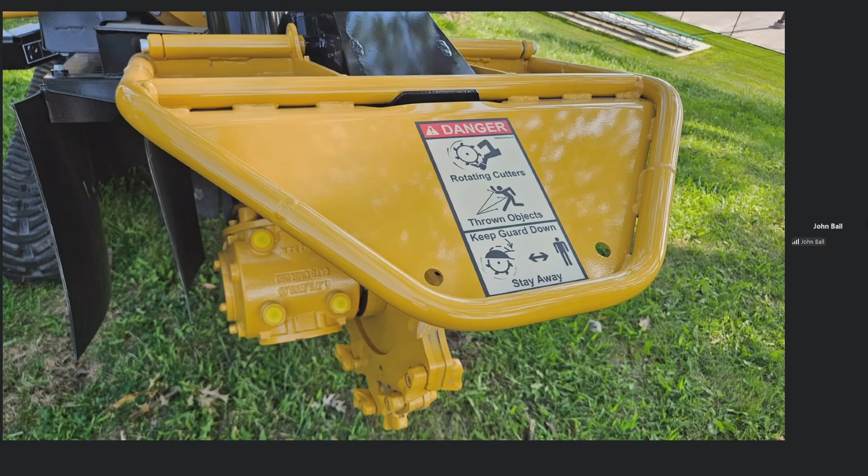A lot of the units are not like this, where the operator is standing behind that shield, operating the controls at all times. But instead, we've gone to a lot of remote, which allows the operator more freedom of movement. And unfortunately, they've taken advantage of that freedom to be standing up next to the stump that they're grinding, oddly enough, with the need they believe that they have to help clear that debris away from the spinning wheel.

It does not, but unfortunately, their feet are pulled in by catching their jeans, or in one unfortunate recent incident, the operator actually dropped down to use his hands to pull a root away. When it snapped, it dropped his head and he was decapitated by the stump grinder that he was operating. So stay away. You don't want to fall into one of these.

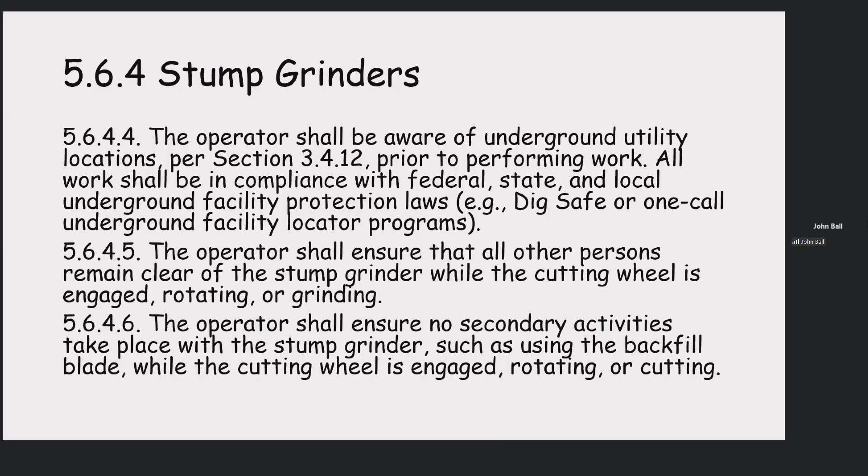And we do have that you have to be aware of underground utilities, of course, that everybody remain clear of the cutting wheel, that there's no secondary activity engaged, and that, guess what? You remain a safe working distance away if you're operating it with a remote.

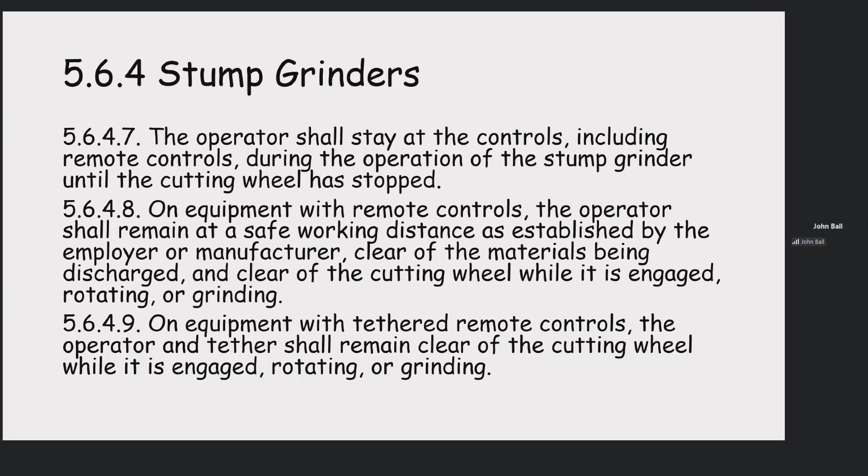Well, I took all my time, and I'm wrapping up with this: if you follow everything carefully, hopefully you won't put into practice the aerial rescues and emergency response that you all need to be trained on as well. So let me finish with this, a reminder that on every crew of two people or more, two people must be trained in first aid CPR.

So hopefully, if I were to ask for a show of hands in the room, and I'm not there to do so, I would find that many of you, not all of you, but many of you would have a current first aid CPR card from American Heart, Red Cross, National Safety Council, or one of the others. Because if an incident does occur, the knowledge that the crew has on how to properly care for someone is critical. And for injuries aloft, while we may have the skills to properly lower someone, do we have the medical training to properly care for someone?

I know you're going to have a discussion on an aerial incident. I'm sure that'll be an excellent presentation. Please pay attention to it. We always can learn by what has happened.